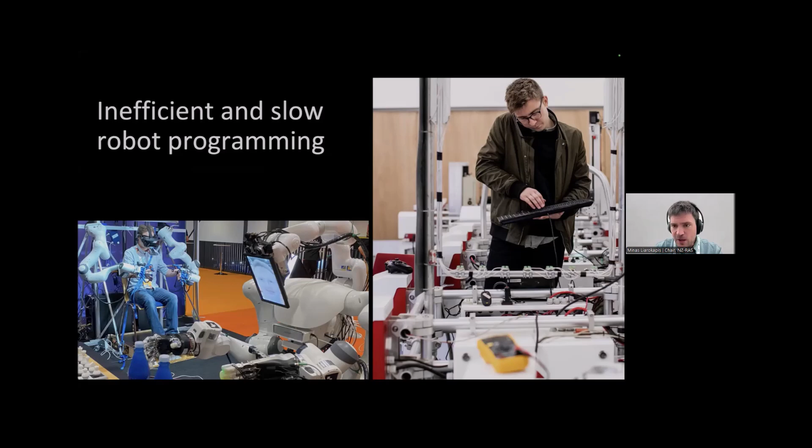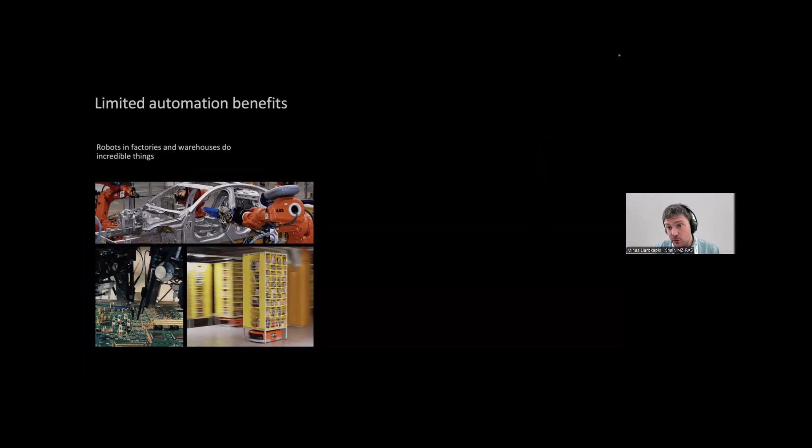So automation and robotics in industry have very limited benefits. Robots in factories and warehouses do indeed incredible things. But we don't see robots in hospitals. We don't see robots in homes. We don't see robots in construction sites. And of course, we don't see robots in advanced manufacturing. The penetration of robotics and automation in industry worldwide is only 4 to 5%, depending on the country, of course.

So we don't see the benefits that robotics can have, and we want to deliver these benefits and to help progress robotics in this direction. So the hardware is ready, but the dexterity and intelligence that are needed in order to deliver impact in industry and society - they are not ready yet.

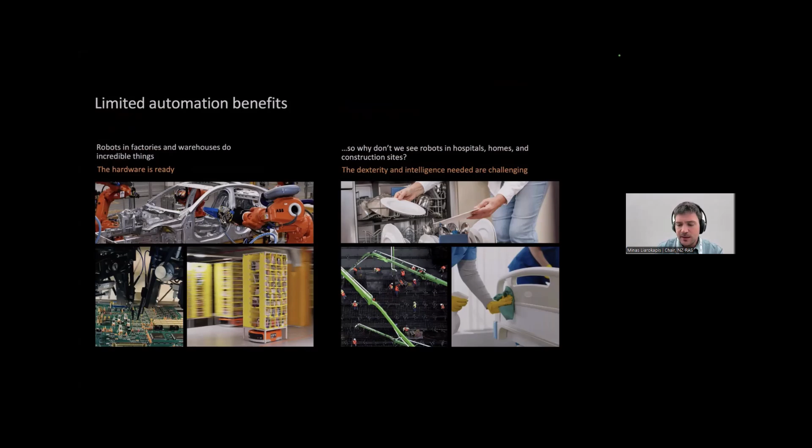So what we believe is happening is that we need human intelligence and expertise to teach robots how to be efficient in a world that has been designed for us, designed for humans. And why do we need that? Because worldwide, we have significant labor and skill shortages. We see this in Japan, we see this in many European countries. Of course, a lot of countries in Asia don't have this problem yet, but it's coming.

The labor and skill gaps are expected to impact economies worldwide very significantly. According to the Boston Consulting Group, they expect a labor gap of 85 million by 2030, leading to a lost worldwide GDP of 10 trillion US dollars. So we're talking about a huge opportunity to deliver new robotics and automation solutions, and this is what we are trying to accomplish.

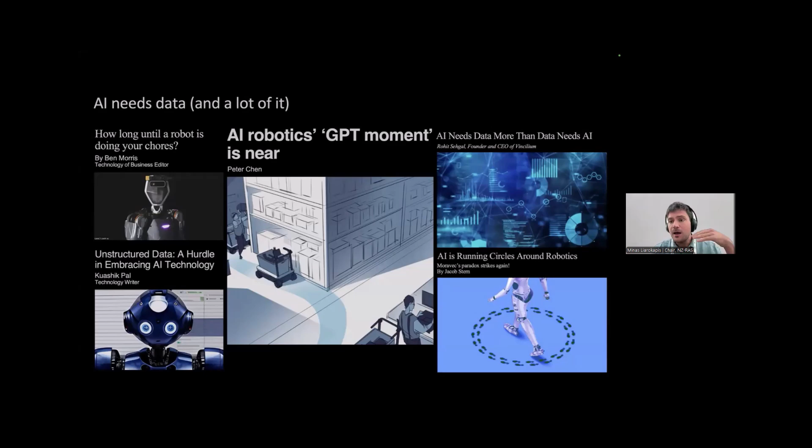If you go on LinkedIn every day, you hear a lot about AI, data, and the GPT moment of robotics that is near, and the advancement of robotics with new AI models that a lot of companies are working on. But the reality is that if you don't have good data for your models, you don't have good performance and good reliability of your robotic models.

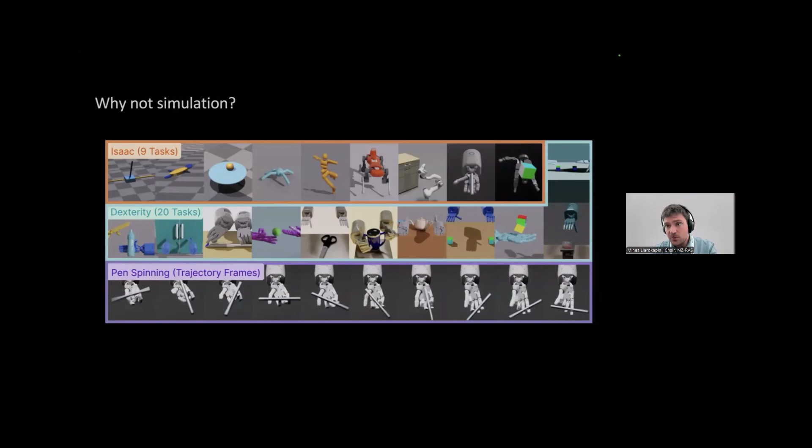So a lot of people in robotics focus on simulations, and this is the work also of NVIDIA. NVIDIA has developed a lot of simulators and is doing a lot of work on simulating robotic actions, robotic interactions with the environment. And although NVIDIA is capable of executing very dexterous tasks in simulation, these tasks cannot be delivered in real life. So what is our focus?

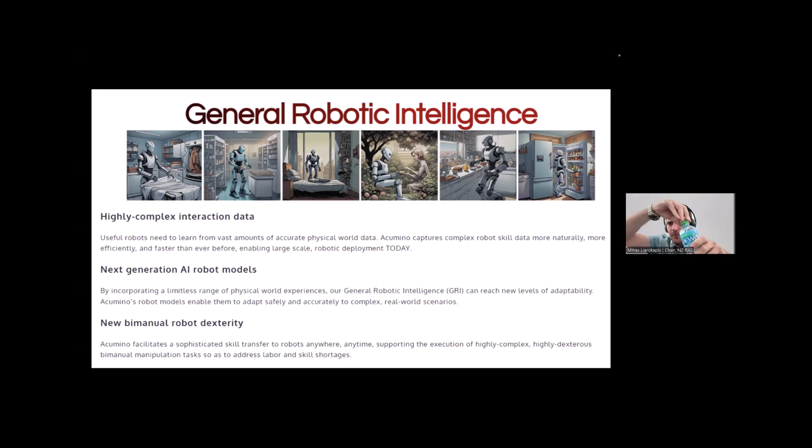Our focus is to provide what we call a general robotic intelligence. In order to do that, we need highly complex interaction data that encapsulates the physical interactions with the environment. For example, when I am fastening this lid on the bottle of water, I need to capture all the interactions of this task, the physics of the contact, the forces, the slipping, the rolling, the contact compliance. And we need sophisticated and very accurate data to develop next generation AI robot models.

And we need what we call bimanual robot dexterity. We need dexterity that takes into account both arms, both hands, to execute tasks that are complex, that need the coordination of two arms and two hands.

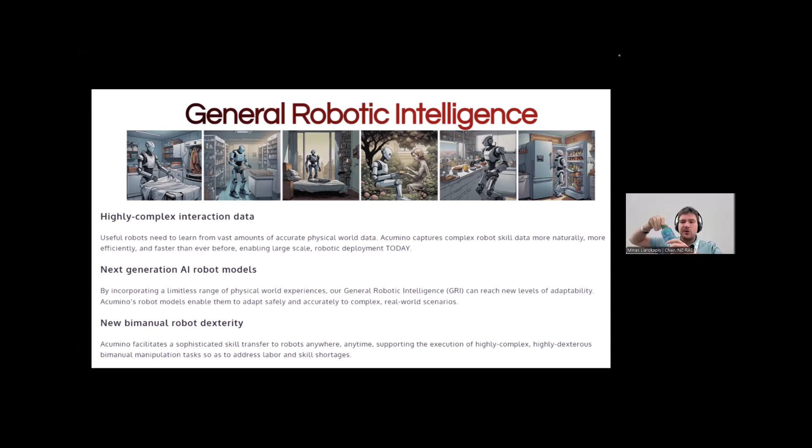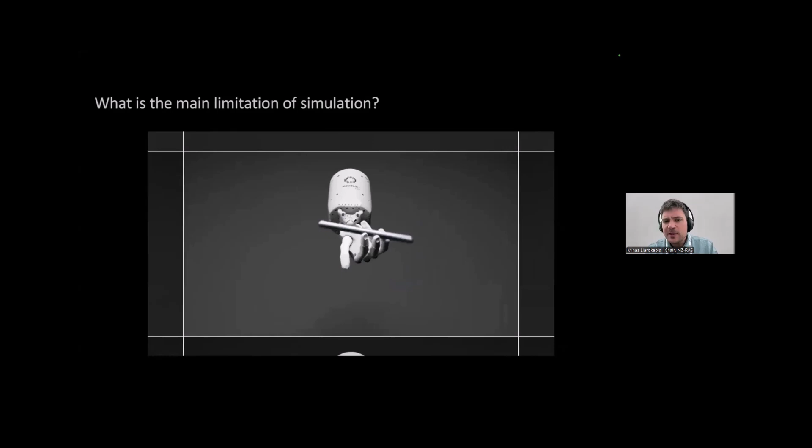You see here in simulation that NVIDIA can execute very complex tasks, but these tasks can only be done in simulation if you don't have accurate physical data from real life, because you have what we call in robotics the sim-to-real gap. And this is the big bet of robotics today: how you go from the simulation, where you are very successful, to reality, where you are able to execute such complex tasks in real environments.

So we have developed a completely new method that allows skill transfer between humans and robots that is very fast, very cost efficient, and very scalable. And it is many times faster and more cost efficient than pendant-based teaching, kinesthetic demonstration, and teleoperation-based teaching.

It works by having the human in the loop and by accommodating the robots, the robotic grippers and hands, as end effectors of the human. So the human wears the robot hands and grippers and demonstrates the task to be done by the robot. We use augmented reality to do model validation and refinement, and we have what we call a hardware agnostic solution, so we can deploy the system with KUKA, Yaskawa, Fanuc, Universal Robots, any kind of robotic manipulator or robotic hand.

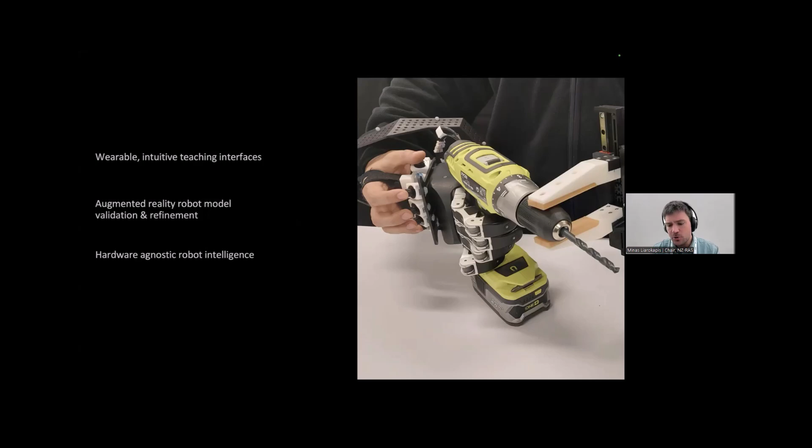So we have the human side, where the human demonstrates the task with a robotic gripper or hand, and the robot side. The whole skill transfer is accomplished in just 1 minute. In that minute, you can have all the data collected, train your model, and then get the model deployed to the robot.

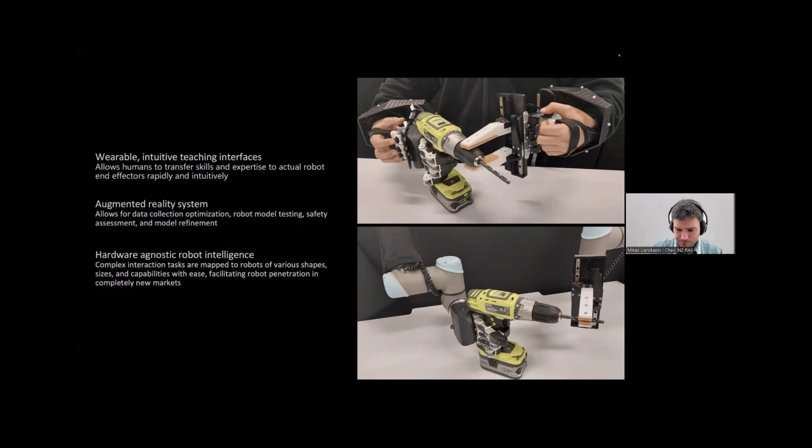Let me show you a little bit how it works on the skill recording side. We record the forces, the poses, the torques of the interactions, the complex phenomena that encapsulate the slipping, the rolling, the contact compliance, the friction, and we populate the skill recording module. We also understand, with pose estimation methods, where the objects are in physical space. Essentially, after the skill refinement, we create a database of robotic skills that have been demonstrated by the human.

In deployment, what happens? We have a task classification module that allows us to understand, in the world around us, what is the task to be executed, and what is the trajectory that is needed for this particular task.

Then we retrieve from the skill database the skill that we need for this particular task, and the vision system together with the perception module give us the new object pose. With that, we can derive desired poses, forces, and torques so as to send them to the control module.

And the control is completely hardware agnostic. You can do it with a humanoid, you can do it with Universal Robots, KUKA, Yaskawa, Fanuc, all the different robot manufacturers. And you can do it with industrial robots or with humanoid robots.

And we also record the edge cases. What are the edge cases? What went wrong? How does the robot fail? Why does the robot fail? And we try to iteratively improve the robot performance by focusing on what went wrong.

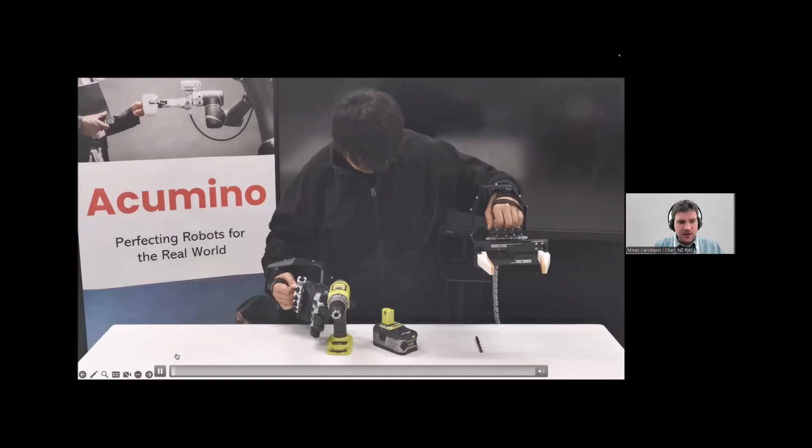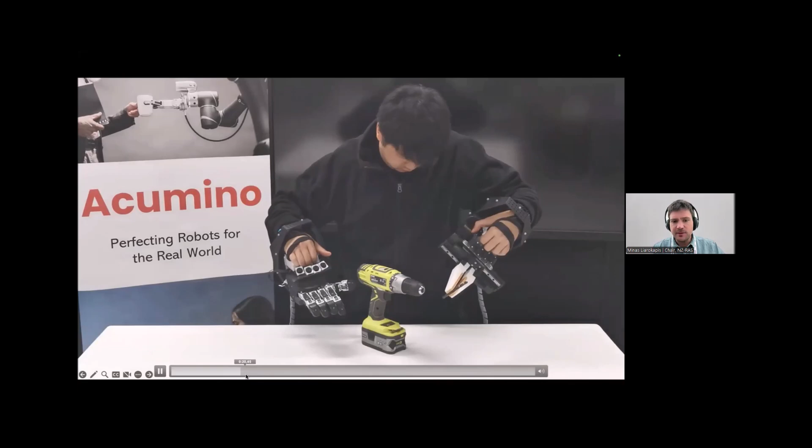So here we have the human demonstrating the task of fastening a drill and then taking the drill bit and putting the drill bit inside the drill. And then the human presses the button of the drill so as to fasten the drill bit.

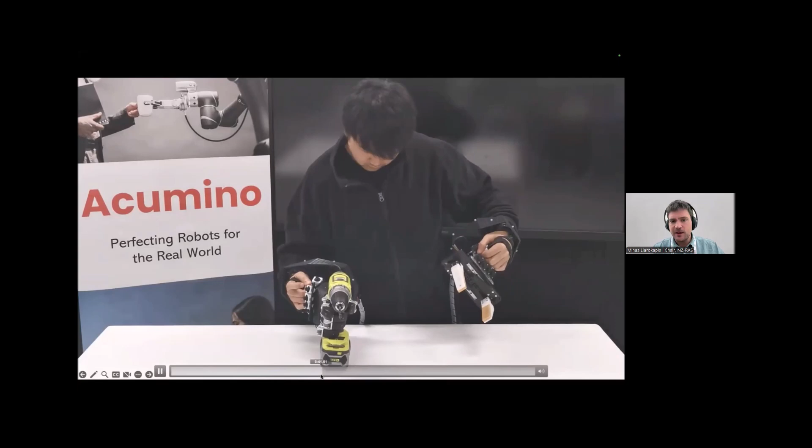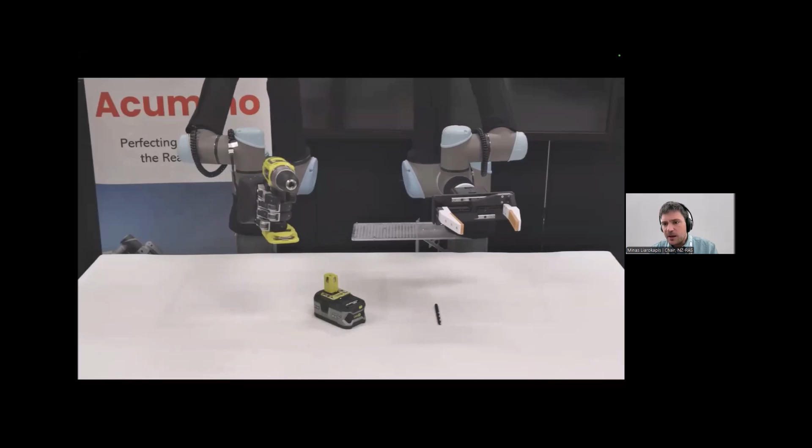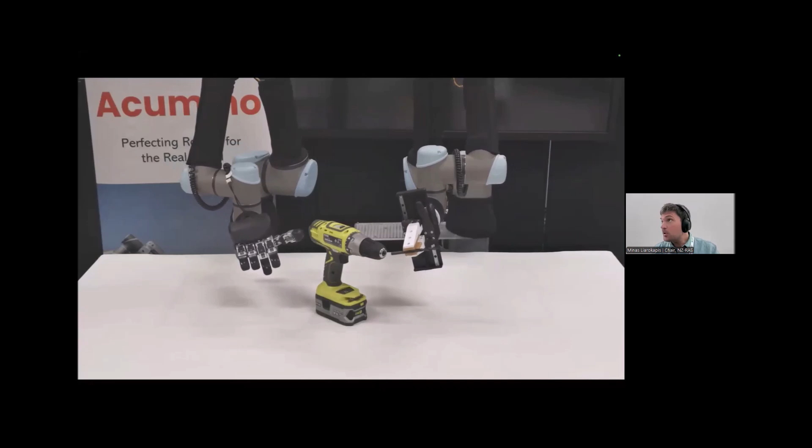Now, once we have demonstrated the task with the human, the task can be demonstrated by the robot. And the robot can again install the battery of the drill and then pick up the drill bit, install the drill bit, and once the drill bit has been installed, the robot can fasten the drill bit so as to operate the drill. So this kind of technology allows for very, very, very fast replication of the human skills at the robot level.

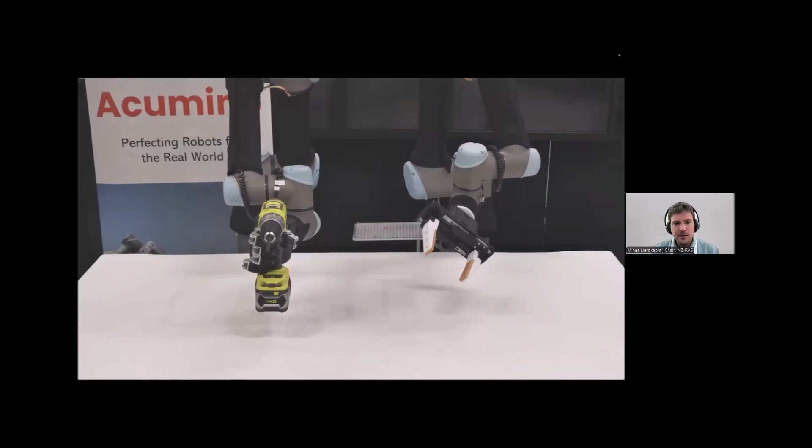And then once you have a fully fastened drill, you can use it in order to drill something, to open a hole on a piece of wood.

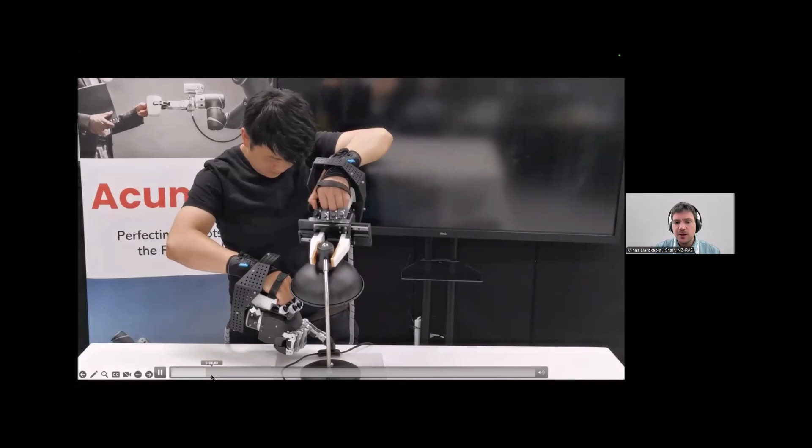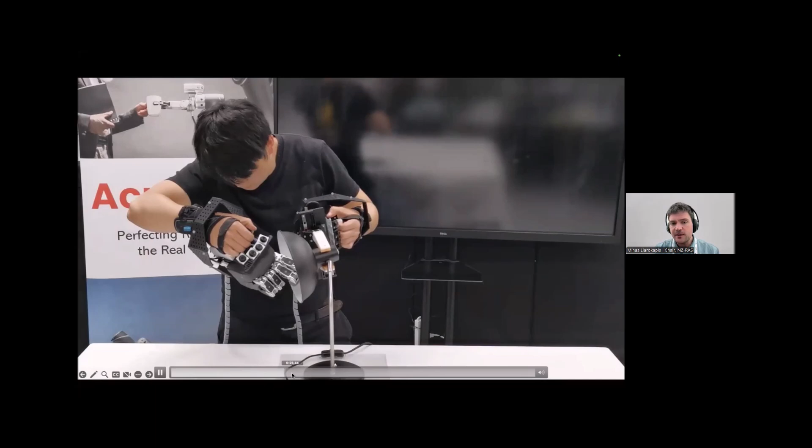Let me show you another example. Here we have the human that tries to turn on a light lamp, and the light lamp doesn't turn on. So the human rotates the light lamp and tries to fasten the light bulb. And then after the fastening of the light bulb, the light turns on.

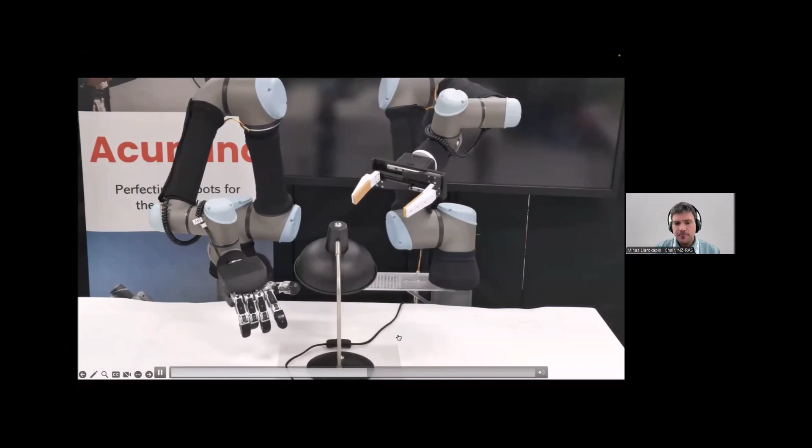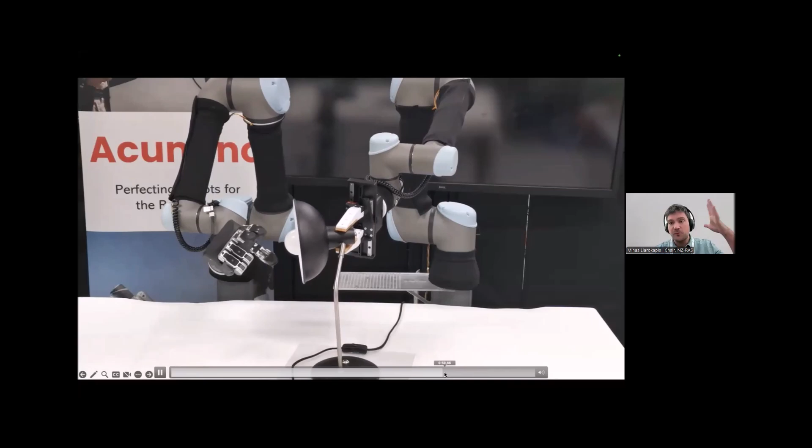So the robot can very, very easily replicate the task demonstrated by the human. And even when the pose of the lamp is in another location because of differences in dynamics between the human and the robot, the skill can be easily generalized to the new location of the light lamp.

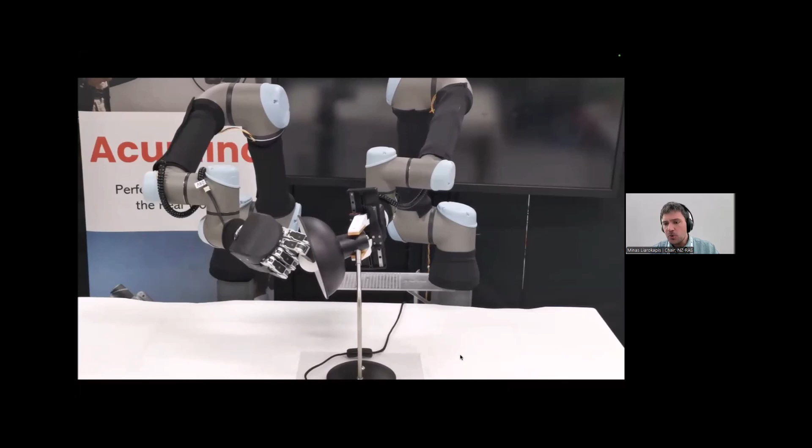And because we demonstrate the skill with the human in the loop, we can even manipulate fragile objects like the light lamp. So you see that we can transfer to the robot very, very different skills. Skills that have to do with assembly or skills that have to do with manipulation of very fragile objects.

And the common questions that we get is, okay, how does this allow us to improve the penetration of automation? How do we start automating? Where do we start automating? Because the human is in the loop and because the system is wearable, you can easily go to factories and collect big data of human skills.

And then you can transfer these human skills to robots, and you can have, with all the data analysis that you perform after the data collection, a comprehensive roadmap on how to deploy complex robotic solutions that attack significant problems in the industrial automation setting, like robotic assembly, manufacturing, or material processing.

And we do that using the model of robots as a service. The whole idea is to have a full system that has the robot hardware, the robot intelligence, and the factories that just use the robot as a service on their premises.

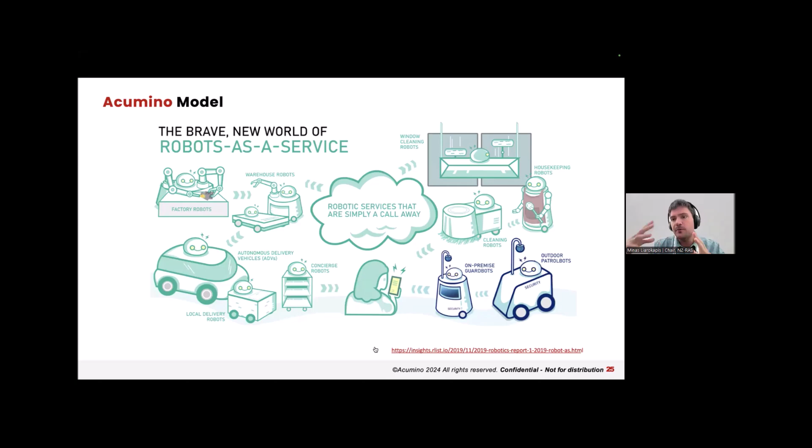We just believe that the first step is industrial automation. The first step is to increase the penetration of automation and robotics in factories. The first step is to remove humans from jobs that are dangerous, that are remote, that are tiring, that are boring. And we can use the humans in other things that are more creative.

I don't think that we need AI for writing poetry or for creating movies or for creating art. I think that humans, we are great at this. We need AI to deliver value in industry. And then humans can have more time in order to write poetry or create art. Thank you so much, and I'm happy to take any questions.